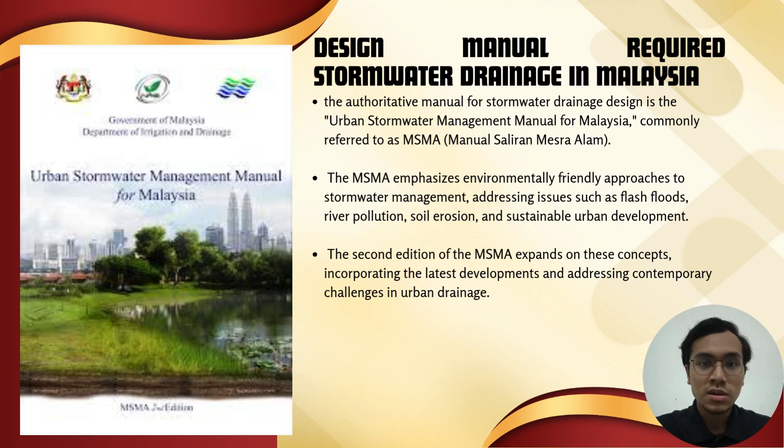The authoritative manual for stormwater drainage design in Malaysia is the Urban Stormwater Management Manual for Malaysia, commonly referred to as Manual Saliran Mesra Alam or MSMA. The MSMA emphasizes environmentally friendly approaches to stormwater management, addressing issues such as flash floods, river pollution, soil erosion, and sustainable urban development. The second edition of the MSMA expands on this concept, incorporating the latest developments and addressing contemporary

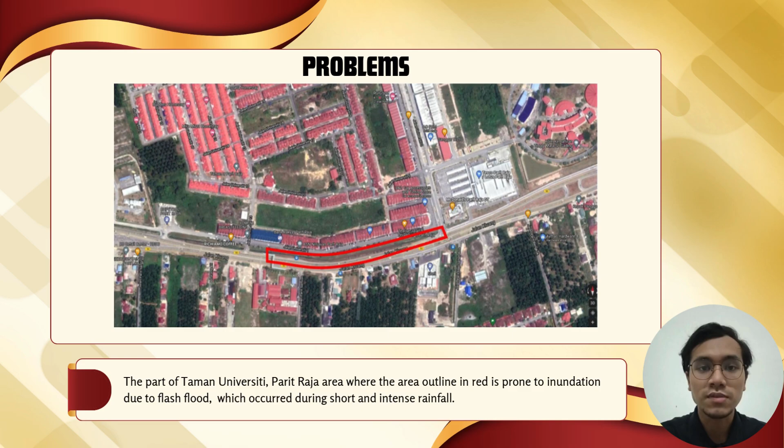challenges in urban drainage. This is the problem for this project. Part of the Taman Universiti Parit Raja area, the area outlined in red, is prone to inundation due to flash floods, which occur during short and intense rainfall.

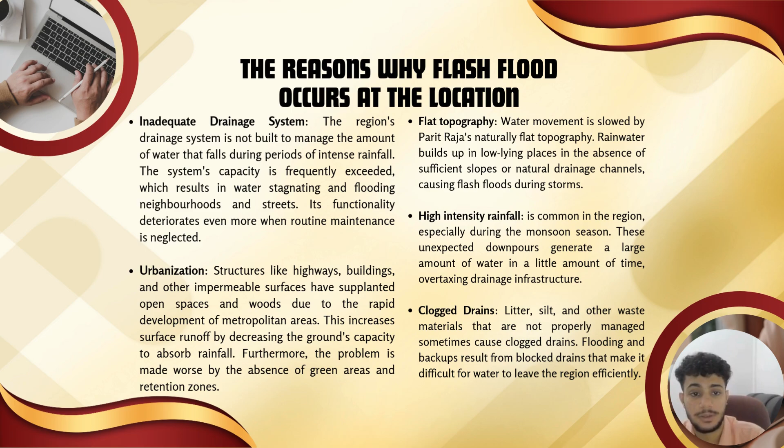The fifth one, clogged drains. Litter, silt, and other waste materials that are not properly managed sometimes cause clogged drains. Flooding and backups result from blocked drains that make it difficult for water to leave the region efficiently. That's all for the reasons for flash floods at the location.

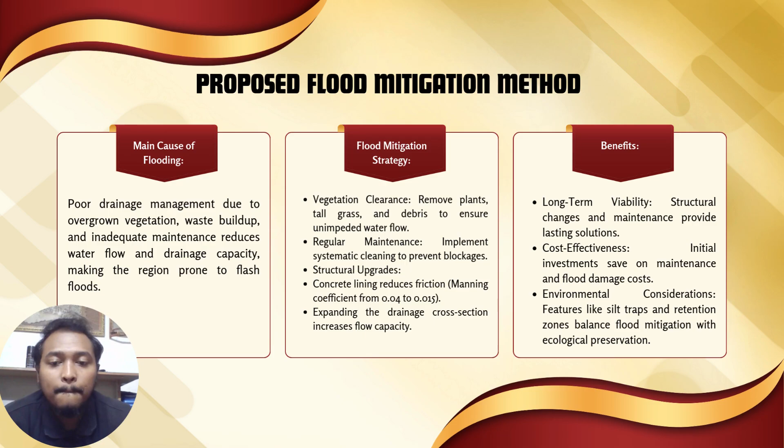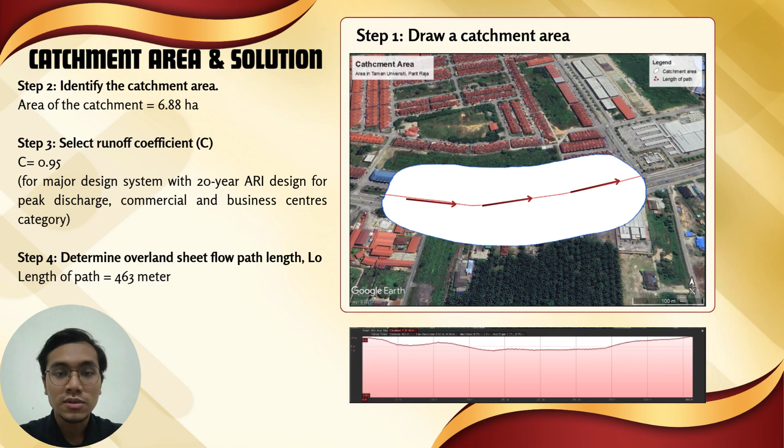Step 4, determine the overland sheet flow path length, the Lo for the flow path in the catchment, to calculate the time of concentration. The Lo for the catchment is 463 meters. Then for step 5, determine the slope of the overland surface in percent.

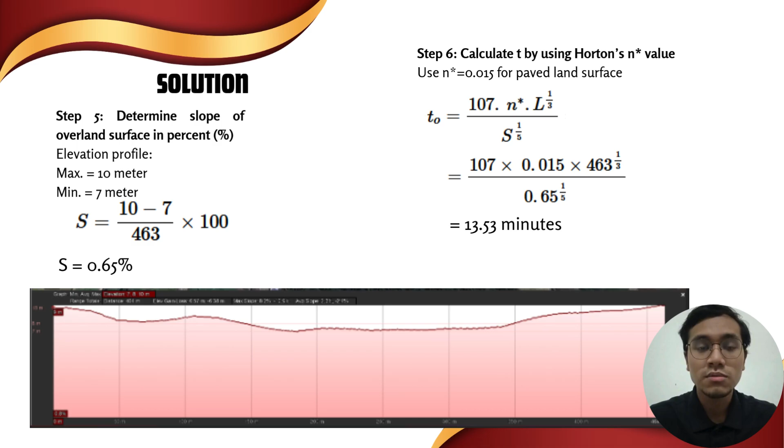The slope of overland surface from the calculation is 0.65%. Step 6, calculate To by using Horton's n value. Use n equal to 0.015 for paved land surface. From the calculation, we get 13.53 minutes.

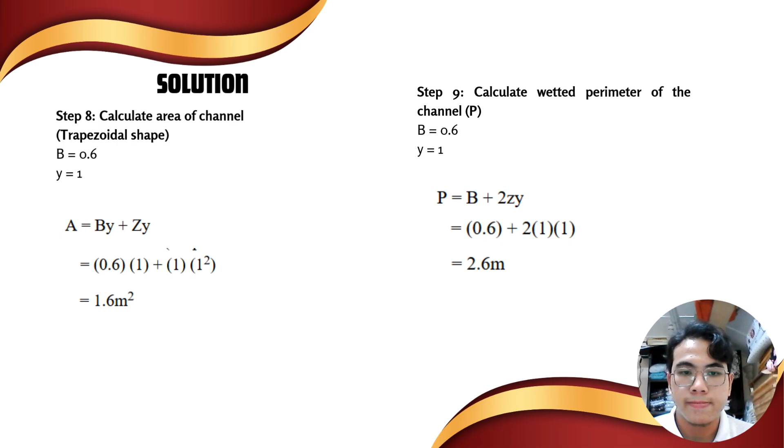So next is step 10, which is to calculate hydraulic radius using the area and wetted perimeter that we got from the step before, which is area 1.6 meter and wetted perimeter 2.6 meter. So the hydraulic radius uses the equation A over P. So we got 0.615 meter.

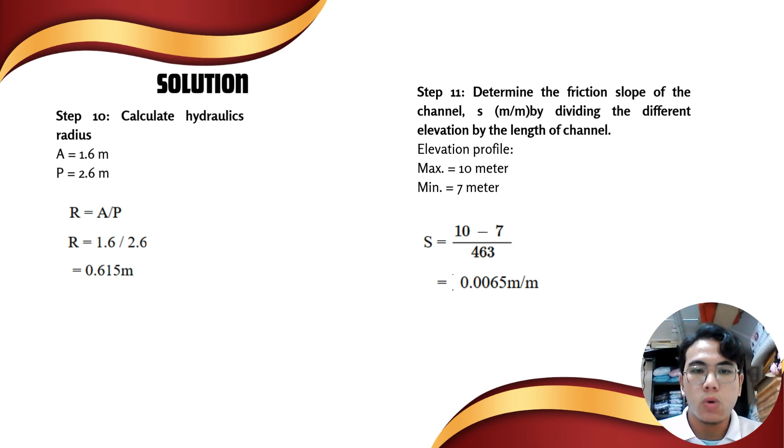So step 11, which is to determine the friction slope of the channel by dividing the difference in elevation by the length of channel. So the elevation profile, the maximum is 10 meter and the minimum is 7 meter. Using the equation S equal 10 minus 7 over 463, which is the length of channel, we get 0.0065 meter per meter.

So next, calculate travel time in channel, which is step 12. We use n equals 0.015, length 463, hydraulic radius 0.615, slope 0.0065. Using the equation in the slide, we got 2.38 minutes for the travel time.

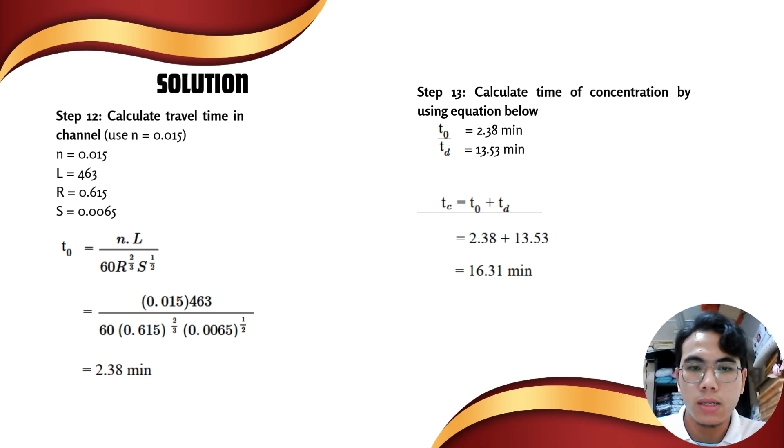So next is calculate time of concentration by using the equation below, which is the time of concentration equal to To plus Td. So To is 2.38 minutes, Td 13.53 minutes. So we add them, and we got 16.31 minutes.

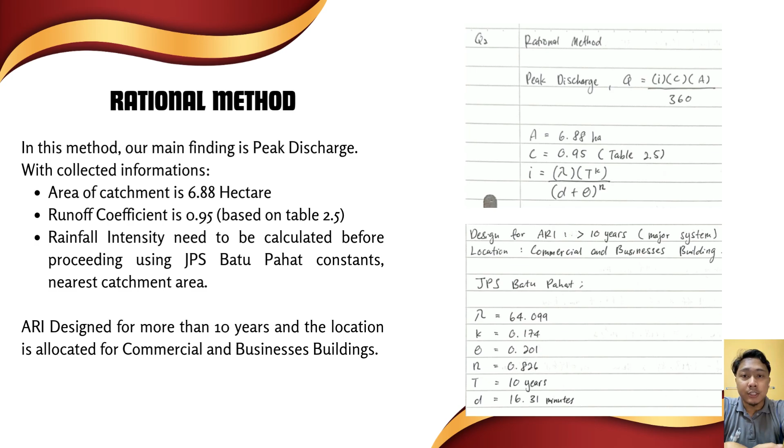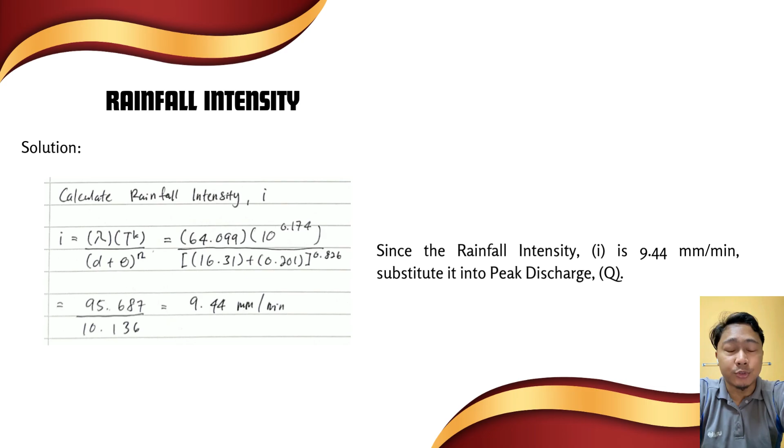While for rain intensity, which is I, we need to calculate it before proceeding to find the peak discharge. So a little bit of information for this part: the ARI design is for more than 10 years, and the location of our project is allocated for commercial and businesses buildings. So with the information collected, we have found our rainfall intensity, I, is equal to 9.44 millimeters per minute.

So after we have found our rainfall intensity, then only we can proceed with calculating the peak discharge, which is Q. Since the formula of Q is ICA over 360, after we substitute our rainfall intensity and other information into the formula, the final answer for the peak discharge is 1713.88 meter cube per second.

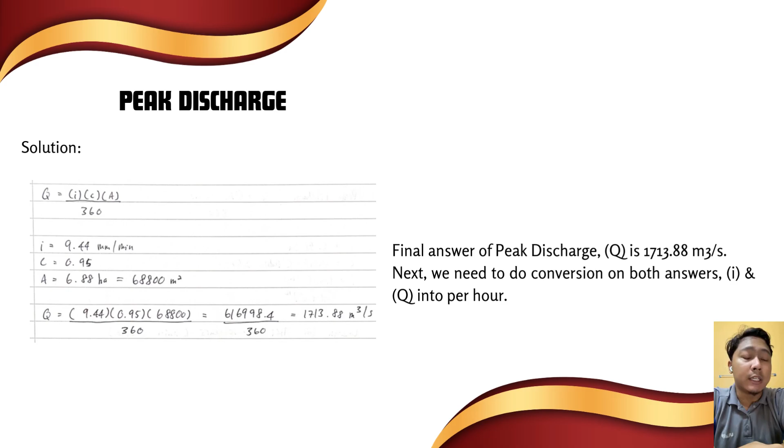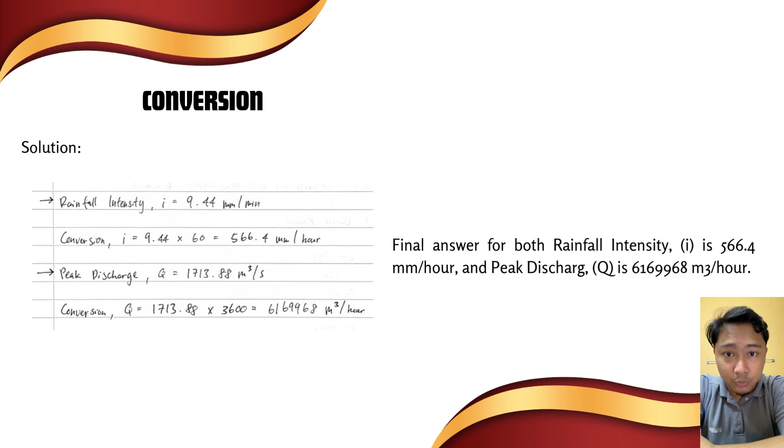So for both answers, we need to do conversion from minutes and seconds into per hour. So after the conversion of both answers, for the rainfall intensity the answer is 566.4 millimeter per hour, while the peak discharge, Q, is equal to 6,169,968 meter cube per hour. So that is our final answer for rational method.

Now I can present about the conclusion. The flood mitigation plan for Taman Universiti Parit Raja addresses flash floods caused by blocked drains, urbanization, flat terrain, heavy rainfall, and inadequate drainage system. The plan includes routine maintenance, vegetation removal, and structural upgrades like concrete lining and cross-section alignment to improve water flow and drainage capacity.

Regular cleaning will prevent blockage, while structural improvement will handle higher stormwater volume, reducing flooding, water stagnation, and damage to property and infrastructure. Despite initial costs, the plan offers long-term benefits, including lower maintenance expense, flood prevention, and improved quality of life. Features like silt traps and retention zones ensure sustainable stormwater management, balancing environmental, financial, and technical needs.